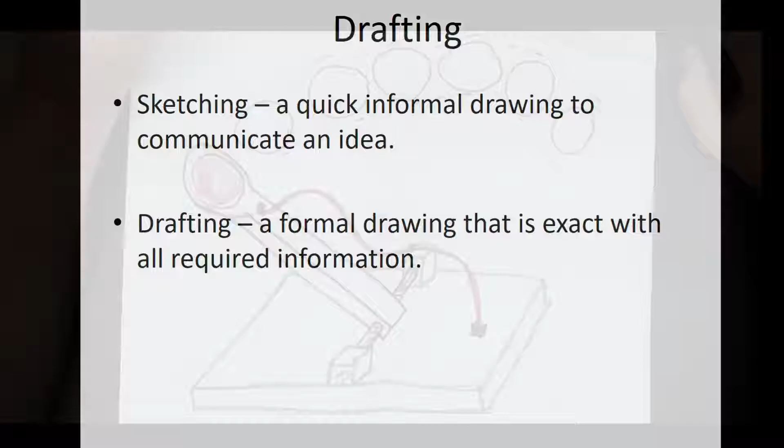All right, so first of all, you need to understand the difference between drafting and sketching. And at this point in your life, if you haven't taken a tech ed or a drafting class, most likely everything that you've created so far in the form of a drawing has been a sketch, which is a quick, easy idea, a quick, easy way to communicate something. So, for example, I wanted to build a catapult. So, this is my sketch of a catapult. And as you can see, I grabbed a piece of paper and a couple of pens and or markers and drew out what I envisioned my catapult looking like.

But the difference between a sketch and a draft is this was a quick, easy way to communicate what my catapult's going to look like. It doesn't have a lot of required information, and that's what a draft is. A draft is a formal drawing that is exact with all required information. And when you say all required information, what are we talking about there? Well, we're talking about the sizes and lengths of things. And so if you look here, you don't know if this board here is 6 inches or if it's 3 feet. And so it doesn't have all that necessary information that you would need to actually build it.

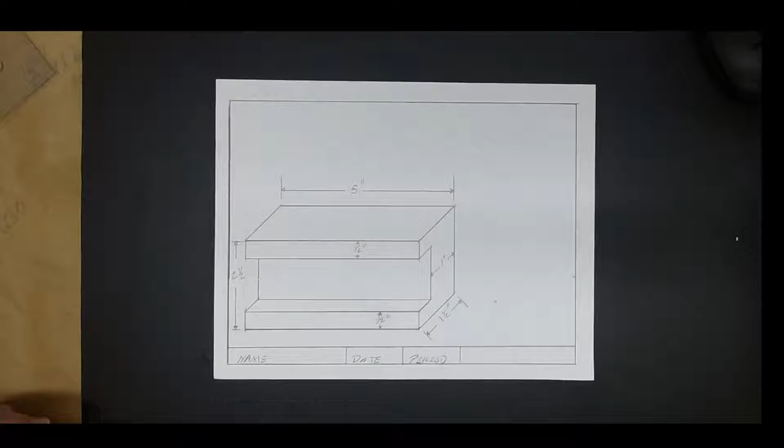Okay. So that's what I mean by a sketch or a draft, and this is a draft. So let me put it here in the center of my drawing board. That is a draft, and you'll notice it's three-dimensional or shows multiple views or multiple sides. It has all the measurements on it, and all that information is there for you. And yes, it takes a lot longer to draft something than it does to sketch something. So just be aware, drafting takes more time. It is perfect. Your things should be exact. Okay, and so that is our goal, is to get things exact. All right. So the difference between a sketch and a draft is obviously one is quick and just communicates, and the other one is a formal idea.

Next tool we're going to use is a drafting board. So at school or at home, instead of using a drafting board, what you're going to probably use is a drafting table or a table at home that has a straight edge. And what I mean by a straight edge is that the left side or the right side has a nice straight edge that you can lean things up against. So a round table does not work as a drafting board.

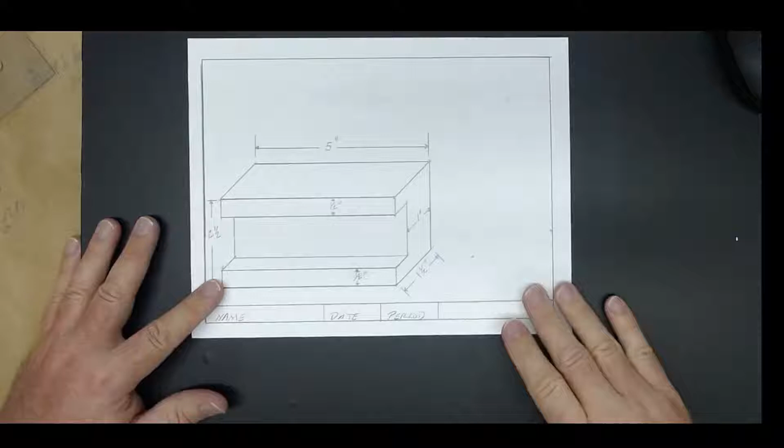Okay, so at school we actually have some drafting boards, and I have one here in the shop with me. Let me show you real quick. So this is the same thing that I was showing on the screen just a second ago. The one on the screen is wood, and this one is actually wood as well, and I have covered it with black shelf paper because when I put paper in front of the camera, when this was white or wood colored, it was really hard to see. When I covered it with black shelf paper, it made it easier to see what I've set down in front of there. So this is my black draft board, and if you look really closely, you can even see there's air bubbles that are coming up through the board now. I don't know where those came from.

But a draft board, what you're looking for is a good flat surface with a straight edge, either on the left side or the right side. And I know you can't see the right side of my draft board, but that's kind of what we're going after, okay? All right, good straight board or flat board with a good edge.

Hey, next thing is a T-square, and I got a couple T-squares here that I'm going to show you. There's two parts to a T-square, so if you look at the slide here, T-squares are used to draw straight horizontal lines.

There's two parts. There's the head of the T-square and the blade of the T-square. So I'm going to put out just a couple samples here for you to take a look at that will show you what we're talking about here. So here are two T-squares. So in the middle of a pandemic where you might be working remotely at home, we made T-squares.

This is a 5-gallon paint stick and a door shim. And this is what we used last year to draft from home. And I'm going to make some of these for remote learning this year. Or if you're at home, you would have access to draft, and I think that's a pretty quick, easy way to do that.

This is a wooden T-square that I purchased years and years ago, and I've had this at home. Boy, it doesn't have the year on it, but I bet I've had this 15, 20 years. And it's just a short wood T-square that I keep out in the shop here for laying things out. And then I have metal ones, I have plastic ones, I have a bunch of different T-squares.

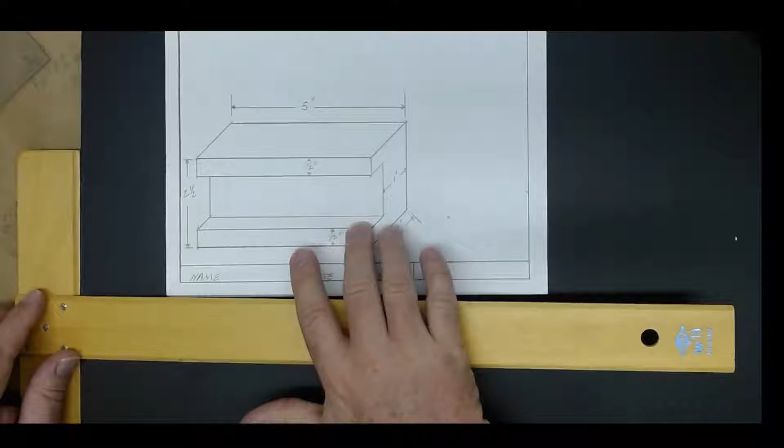This part's hanging down. So when we set it on the edge of a table, we set the head of the T-square up against the edge of the table, and we slide it up and down along that edge. Now when we take a piece of paper and stick it down against the T-square, and if I tape it to the table, as I slide across the T-square, I can use it to draw straight horizontal lines. And so that's how a T-square works. It's used to draw straight horizontal lines. All right, next tool.

Triangles. So triangles are clear plastic, and of course they look just like triangles. There's nothing really very amazing about them. They are usually made out of plastic. Let me show you a couple here. Switch cameras. And so here I have, and see the problem with these clear triangles is they reflect the light, and you can even see the camera directly above me. But so these are clear plastic triangles.

There's two different types. This one's called a 30-60-90, and the reason it's called a 30-60-90 is you got a 30-degree angle, a 60-degree angle, and a 90-degree angle. And then this one here, and these are the same, I got a big one and a small one. This is called a 45-45-90. When we refer to a 45-45-90, people always call it a 45-90. They don't repeat the 45 twice.

So we have bigger drafting triangles, and I have some smaller ones here. Those are my small drafting triangles. I usually use the small ones. They seem to work pretty well. If you are drafting at home, I think what we're going to do is make some of these for you to use at home that are made out of wood. And so it won't be as fancy, but they'll work just as well for what we're doing. If you're remote learning, we want to make sure you have access to these materials, okay? All right, so there's my T-square. I'm going to move my T-square out of the way.

So if you rotate the scale,

Excuse me, I'm yawning. It's too early in the morning to be working, I guess.

And so on the end of the scale, it also tells you what the scale is that you're drawing to. So if I were to use this scale right here, where it says 3/16, that means for every 3/16 of an inch I draw, it's going to be 1 foot. Okay, or 1 inch, and that allows you to draw things bigger than they really are or smaller than they really are.

So my scale here, and these come in different colors. I have a white one here. It's kind of hard to see because it reflects the light so bad. I also have a yellow one here somewhere. Here it is. So these are the same exact thing. They're just printed on different color materials. And so here is my ruler. That has an inch divided into 16, and then I have all kinds of different scales on here.

Again, if I need to draw something bigger than it is in real life or smaller than it is in real life, I can use a scale. And what that does is it draws it proportionally accurate, but just smaller to fit on the table, okay, or onto the piece of paper. All right, so that's how a scale is used.

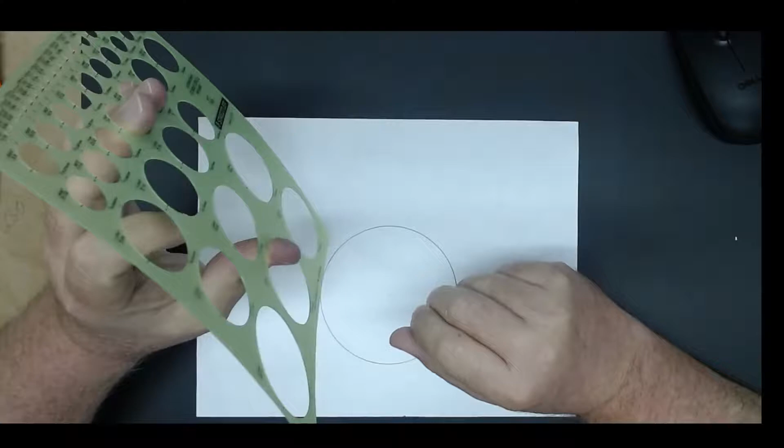They're really good at making perfect circles. They're easy to trace. They're easy to follow. What I don't love about them is they're expensive, and middle school kids love to hold them like this and flex them in their hands, and then they break usually between the small circles. They snap, and then we have to replace them.

I still have my circle templates that I bought in 7th grade, still use them every week, but the ones at school seem to last us about a month. So take good care of our circle templates. Don't bend them, don't flex them, and don't spin them on your finger or a pencil. Okay, circle templates used to draw circles. They work really well. Take good care of them.

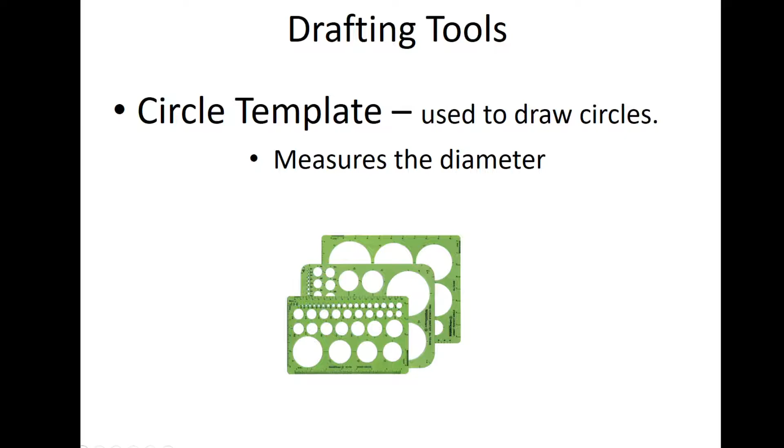Next up. You've all seen these. We've been asking you guys to get protractors for 100 years, and it seems like every year they're on the list, and every year you don't seem to use them very much. But protractors work great. They're used to measure angles, and there's 3 different types of angle. There's a right angle, an acute angle, or an obtuse angle. And if you don't know what those are, come see me.

But what I have found in the last couple of years is they're teaching this to you in elementary school, so you guys come to us knowing. The one thing I'll warn you about protractors, and I don't have one sitting here I'd show you, is that the first thing you need to do when you pick up a protractor is study the protractor to see if you know how to read it accurately.

So this protractor, you would put the base of your triangle on this line here, and the corner of the angle here, and make sure one side of it lines up with the 0, and then you can measure that angle no matter how big it is, and so forth. Some protractors, you put the baseline of the triangle down here, and 0 starts all the way down here. So they're all just a little different. They're all a little bit weird and quirky. So the important part is to make sure you understand before you start how your particular protractor works.

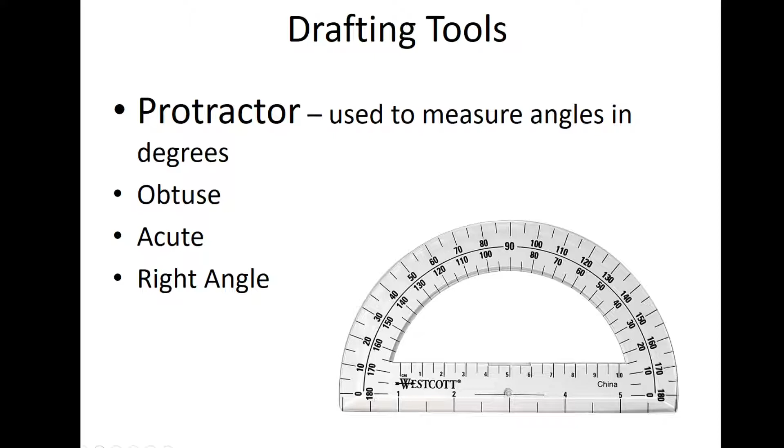All right? All right, next tool, French curves. So we've given you a tool so far to draw straight horizontal lines. And straight horizontal lines is what we use the T-square for. And to draw vertical and diagonal lines is what we use the triangle for. And to draw circles, we had two different tools. We had circle templates and compasses. And again, usually use circle templates to draw small circles and compasses to draw big circles.

And so now we need a tool that will draw arcs and curves. And so on the screen here, you're seeing four different types of French curves, and these are used to draw arcs and curves.

You'll notice when you look at the arcs and curves that we use in class, they have pencil marks on them, and that is if you want to draw the same arc or the same curve over and over and over again. We mark it on the French curve, and it lays it out for you so you can use it over and over again.

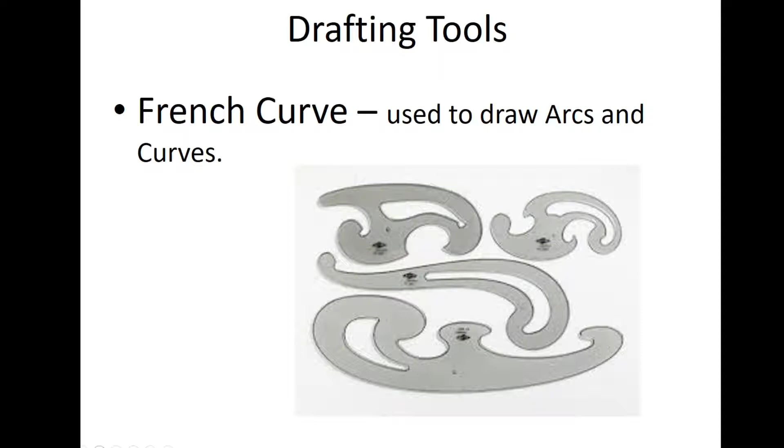I don't know why I'm yawning so much.

I'm tired today. All right, next up, you're going to need a roll of tape. And this is a roll of masking tape. They actually make special tape for drafting, and it's really expensive. And let me tell you the properties of good drafting tape is that it's not very sticky, so it comes off your paper pretty easy. You know what we use? We use cheap masking tape, and it works just the same.

Or like at home here, I don't have any masking tape, but I do have a roll of blue painter's tape, and it works wonderful. It's expensive. I wouldn't recommend using this every day, but if you have a couple drafts to do, this blue painter's tape works just as well. Nothing fancy, but it holds your paper down, and it doesn't tear the edges of the paper off when you pull on it. So you're going to need some tape.

Okay. All right, let's show you a little bit. There's a bunch of draft tools all laying up there. I love this picture, and let me tell you why I like this so much. This picture was taken about the same year that I was born. And so there are some things that have changed, and there's an awful lot that has not changed. So as you can see, all those tools are sitting on a drafting board that is wood colored. There's a T-square there that is wood, and the blade of the T-square is kind of a natural wood color, and the head of the T-square is painted black, but that works the same as any T-square.

You'll notice the triangles here are orange. Mine were clear, but they come in several different colors. I like the orange ones because they're easy to find when you set them down on the table. The clear ones kind of disappear, but the clear ones are cheaper, so that's why we use them. If you look here, you can see the French curve. You can see a scale, the drafting tape, the compass. Oh, I didn't mention this, an eraser.

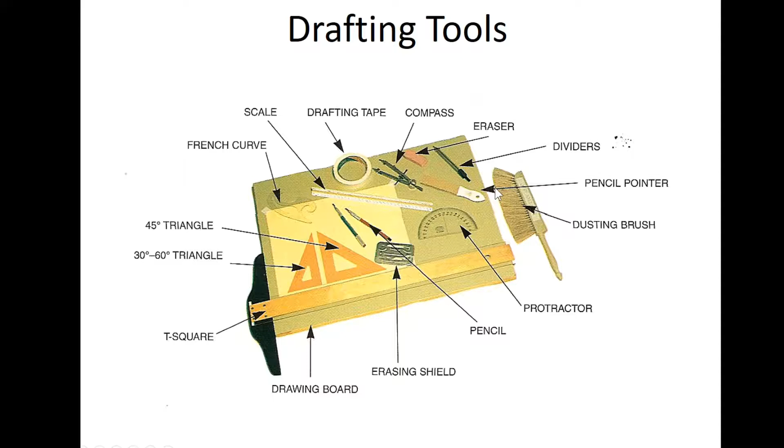So if you were sharpening your pencil in class and you had all these little particles of lead, sometimes they would get on your table or on your paper, and if you used your hand to sweep them off, it would smear them. So you use this dusting brush to dust the eraser marks and the shavings from sharpening your pencil, or any dust off your paper. Well, obviously we don't need the dusting brush or the pencil pointer anymore. We've kind of gone away from that.

All right. So, hey, let's chat a little bit about different types of lines. In another video, I'm going to do some lines for you, but this is just a couple of them that are important here. I wish this was in a different order. I always like to talk about construction lines first. So when you go to draw something, I want you to draw very, very light lines. And those light lines are called construction lines. We use those to build a drawing.

There is a ton of erasing when we draw things, okay? A ton of erasing. So if we draw things very lightly, aka construction lines, we can always go back and erase what we end up not using, what we don't need, or what we need to change. After we draw those lines nice and light, those construction lines, we can always go back and darken them up, and once we darken them up, they become visible lines. So a good solid dark line is a visible line, okay?

Let me see if I have a sample here that I can show you. Okay, so here's a little drawing. I don't know that there's a good example of a visible line or a construction line, but when you watch the first video, when you watch me draw the H, I will explain the difference between a construction line and a visible line, okay? On this, there are some cool lines I want you to acknowledge. So right here, let's start at the top.

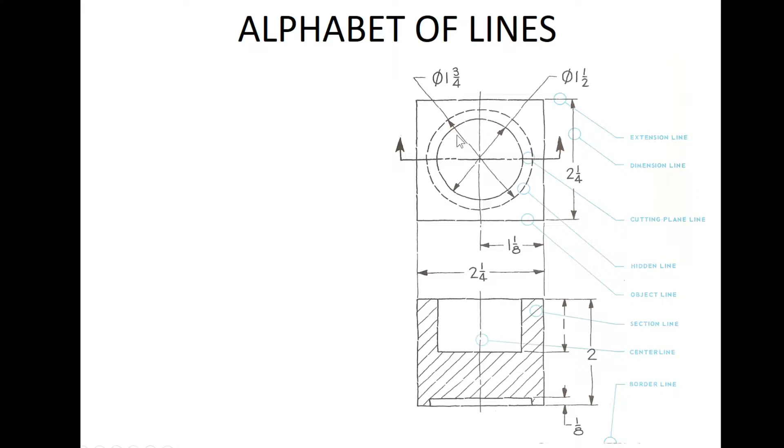If you look up here, here's some more dimensions. This one's saying from here to here, the size is 1 3/4. And this really weird character here is telling us that that's diameter. So that's a symbol for diameter. You could either write 1 3/4 and then write the word diameter after it, or you could just put this circle with a line through it, and that tells people that that's diameter as well. Okay? So just some sample lines.

Let me tell you how we're going to get started. I'm going to have you watch the video on how to draft the H, and the first couple steps are, number one, squaring up a piece of paper, and that process is nothing more than taking a T-square, putting it up against the edge of the board, sliding the paper down to it, and taping it down.

That's called squaring up a piece of paper, okay? So we are taping the paper down parallel to a T-square, okay? And it has to be exact. So what I typically do is put my T-square down and kind of hold it in place. I press down on it, and then I like to slide the paper against it and tape this corner.

And then I slide my T-square down just a tiny bit, and I look across there and see if it looks parallel. If it is, I put a piece of tape here. Then I slide my T-square back over the top and bring it down, and I look at this reveal down here and see if it's straight all the way across. Okay, so that's the act of squaring up a piece of paper.

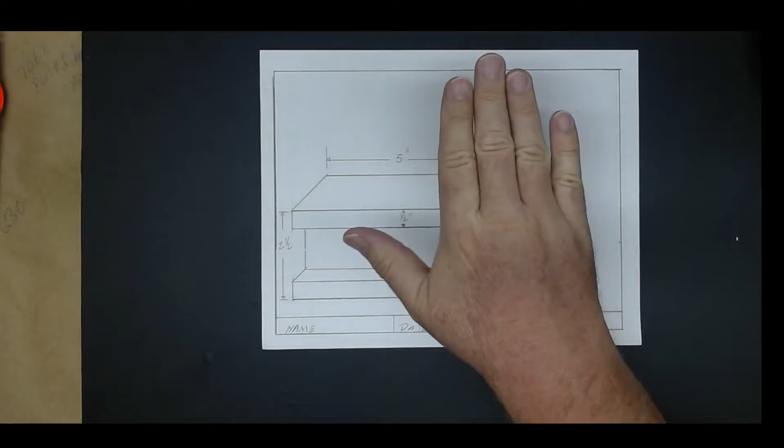The next thing we're going to do is we're going to put a 1/2 inch border on. So if you look at the sample I've already drawn, if you look around here, there is a frame also known as a border that is a 1/2 inch all the way around the paper. And you might notice it looks bigger on the top than the bottom. That's because the camera's not sitting perfectly straight. It's actually angled slightly, and so it makes it look like it's off a little bit. But we went all the way around and did a 1/2 inch border or a 1/2 inch frame.

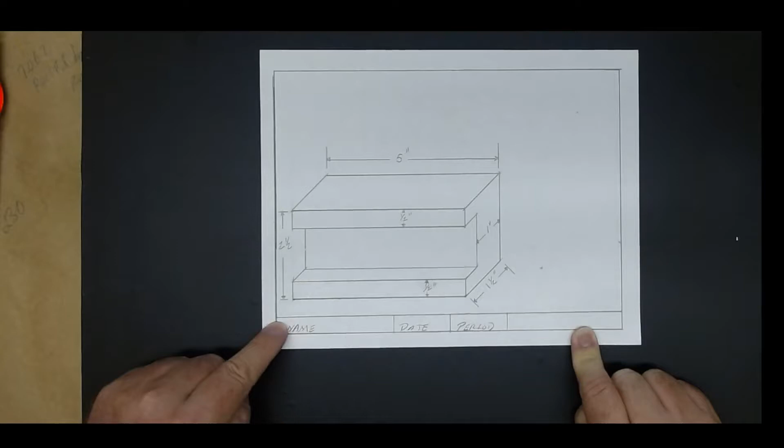The next thing we did is we did a 1/2 inch nameplate. Okay, and so we came up a 1/2 inch from the bottom border, and we divided that into 4 boxes. And there's a box here for your name, the date, the period, and the assignment. And whenever we put any text in there, we always use all capitals, no cursive.

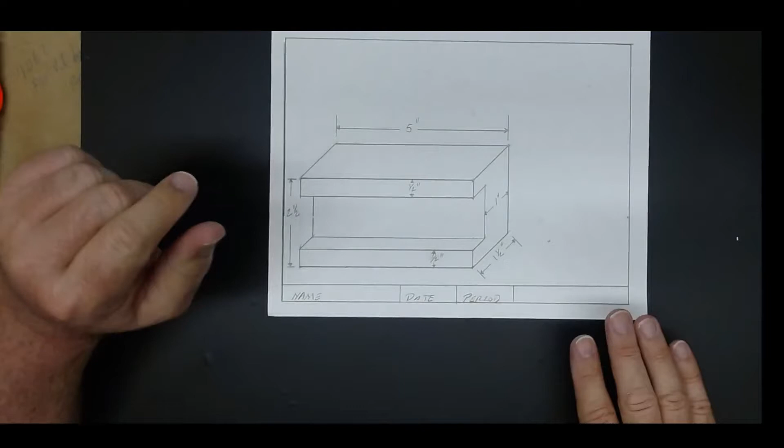And then the last thing we're going to do is we're going to do a 1/2 inch Lucky L. And the 1/2 inch Lucky L is I measure up a 1/2 inch and draw a very light line, and I measure in a 1/2 inch and draw a very light line, and that's where we're going to start our drawing. So this drawing's already finished, so you don't see it there. You will see it when we show you how to draft the letter H. Okay, so that's how we get started. Square piece of paper, 1/2 inch border, 1/2 inch nameplate, 1/2 inch Lucky L, and that kind of gets you rolling.

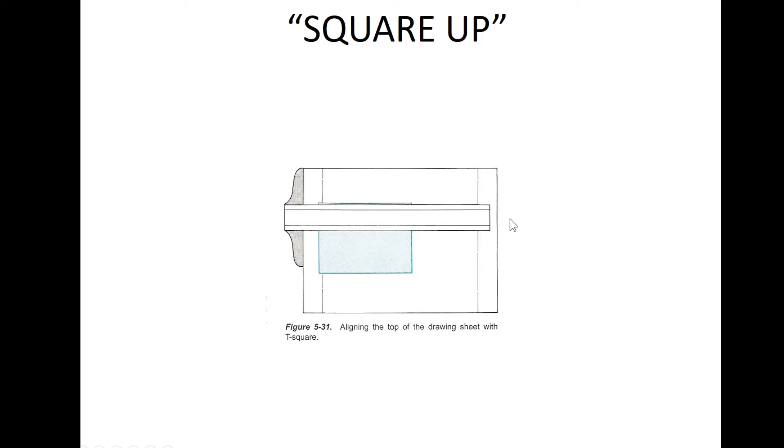Okay, so this shows you a drafting board and a piece of paper and my T-square. So you can see how they're aligning the paper with the T-square. And the important part is making sure the head right here, this portion of the T-square, is up against that edge of that board or on this side. It has to be on the left or the right, but once you pick a side, we keep the T-square there the whole time for the whole project, okay?

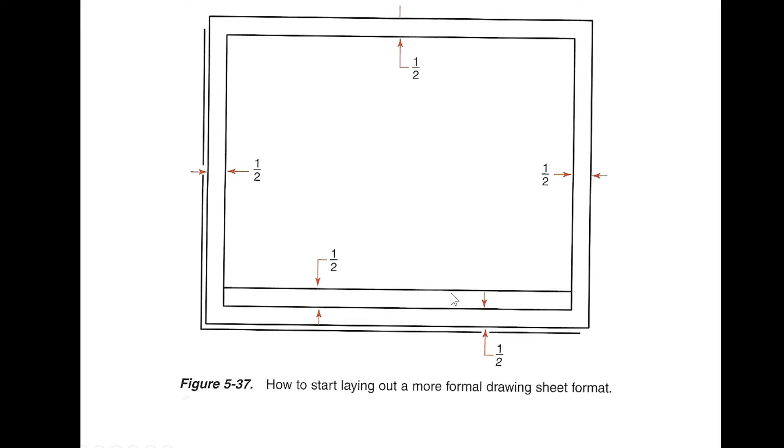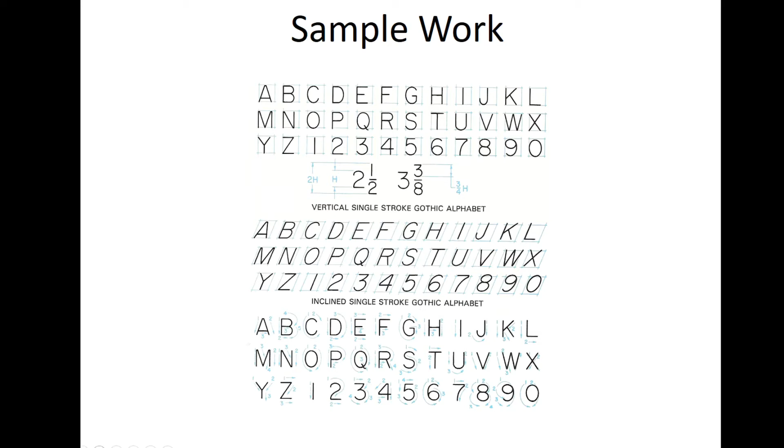So when I was your age, they used to make us practice writing letters over and over and over. We spent weeks on this. I'm not going to do that to you guys. I'm going to ask you simply, when you write on your drafts, to use all capital letters, no cursive, and just do as nice a job as you can creating those letters, keeping them the same height and width the best you possibly can. Okay, that's one of those things that'll drive you nuts if you're no good or you have fine motor skill problems, or it's real hard for you to write real nice. And that's kind of the story in middle school.

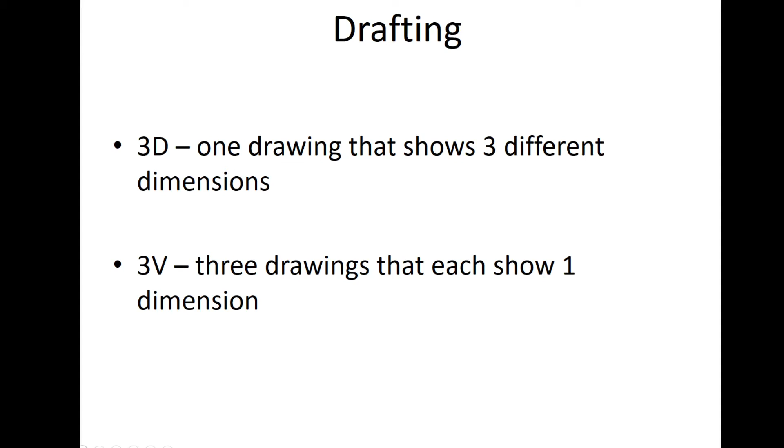Here's kind of a little piece of sample that I've done before. So that's kind of the scoop. That's the deal. That's the intro to drafting tools. So we went over drafting boards, T-squares, triangles, scales, compasses, circle templates, protractors. Did I miss anything? I think that's it. So those are kind of the introductory drafting tools that you're going to need this year. So good luck, and the next video will show you how to draw something, okay?